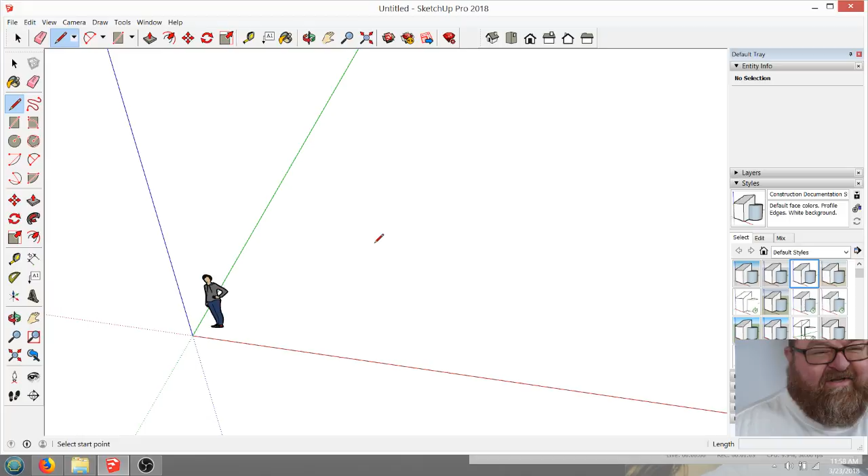But the way it was designed, it was initially intended to be a suspension cable bridge where those web members were designed to be supported by the cables. Anyway, I didn't really mean to start off this video that way, but it's a coincidence.

This viewer asked me about a truss for a pole barn, and so I thought I would help him out. He said it was going to be 26'6" wide, so I'll go into my upper view mode here, and I'll start off by drawing a line 26 foot 6 inches, and that's the width of his pole barn. Now, I tend to overkill this stuff a little bit. Let me make sure I've got my mouse tracking. I would make these out of 2x6s, but you can make these out of 2x4s. 26'6" is not a crazy span.

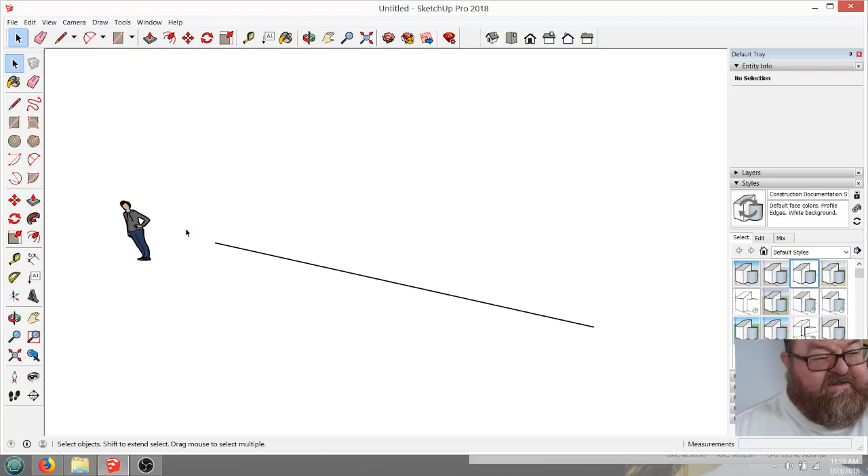Let me turn off this axis so I can delete this guy. It's funny because SketchUp comes with a little person in there to sort of orientate you to your view, but I've gotten used to it, so I don't need that.

Anyway, I'm going to make these trusses out of 2x4s because it'll be more economical. It's a pole barn, and it's really not that necessary. Let me turn my axis back on for a second. I'll just leave it on. It's not that annoying. The 2x4 trusses will be more economical, and so that's the width of our bottom chord.

I think we talked about a 4/12 pitch roof, so I'll come back 12 inches. For those of you who don't know, 4/12 means that for every 12 inches of run, there are 4 inches of rise. You see that doesn't match up with my 2x4 very well, but I'm going to make that line go to my 4-inch mark, and then we'll delete the part we don't need, that little part right there.

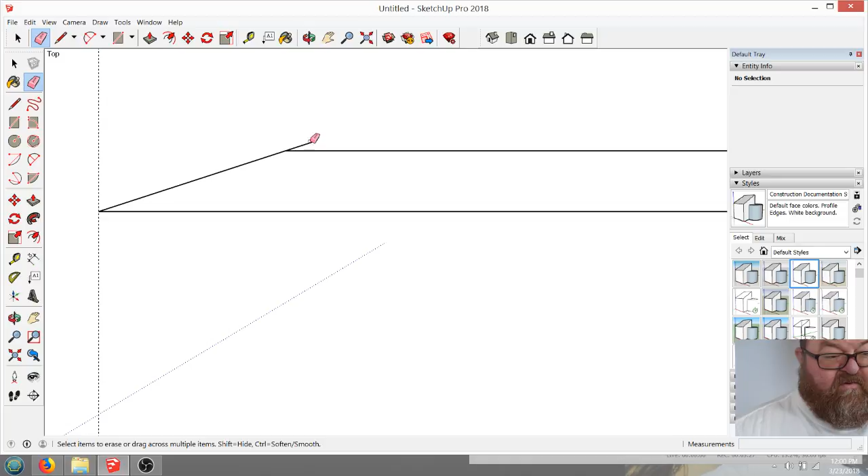And I'm going to do the same thing on the other end. I'll make sure I've got 26'6" again. I'll come down here, go back 12 inches, go up 4 for my 4/12, and that gives me the slope of the cut of the top of the bottom chord. Oops, I think I'll leave that 26'6" mark there. So that is our bottom chord.

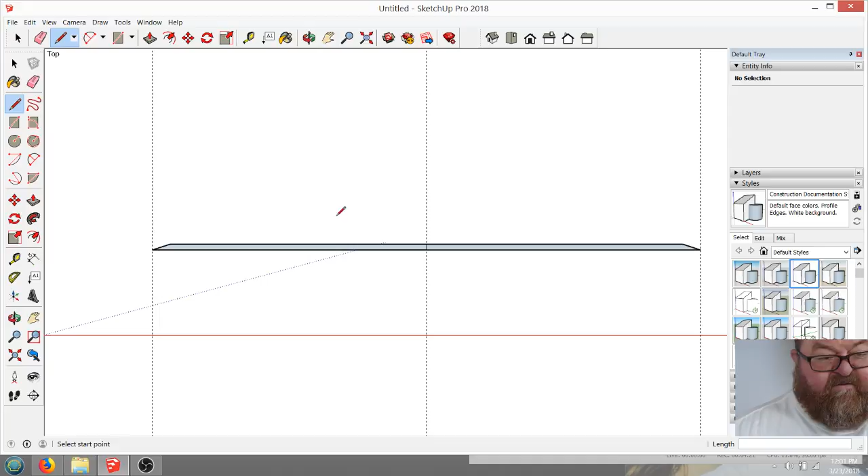Now it will be in 2 pieces. So where's the center? Right there. We'll draw a line for the center. Okay. Now, since my material is 2x4s, I'm going to offset this angle 3.5, 3.5, and give myself a 12-inch overhang that way. Then I'll start up here somewhere, go down to that mark, extend this mark down and connect those 2 points. Then I've got the start of my top chord.

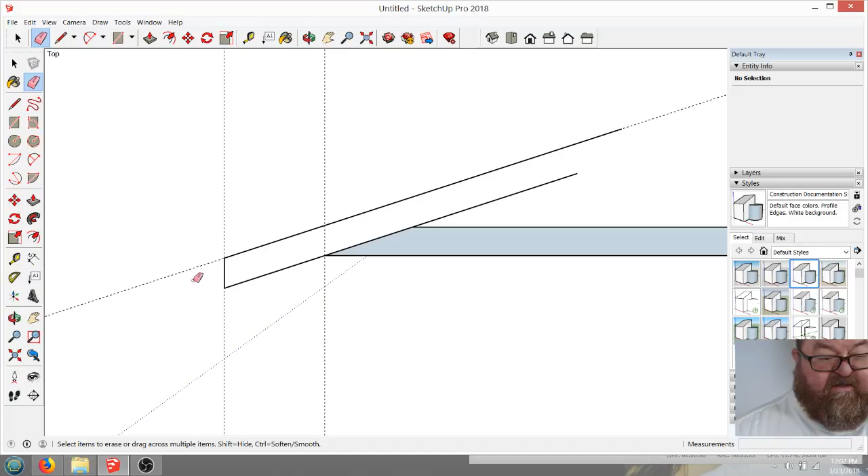And all this stuff is kind of easy. There's a free version of SketchUp online that's basically web-based now, which I think is really cool. I don't know what the full features of it are. This is SketchUp Pro. I'm not sure if it has the same features.

I'm just going to bring that line on down and bring that out, and then delete that.

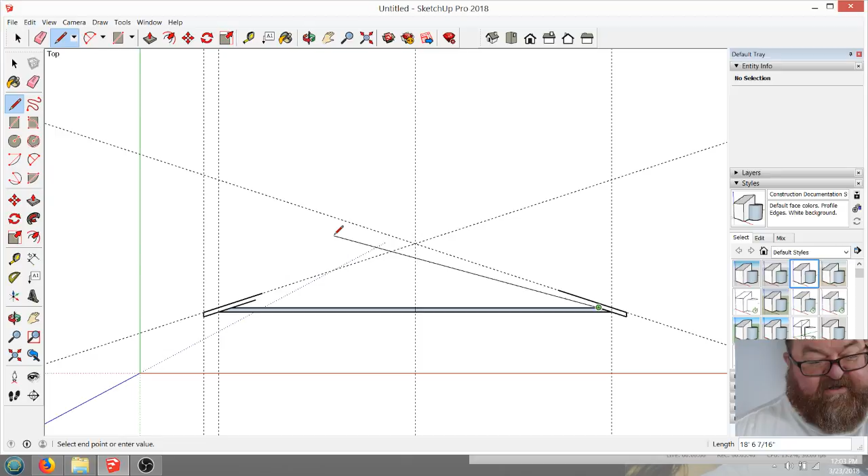Oops, got a little black screen there. Am I still recording? Yep. That's scary. Sometimes I'll get that and it will actually stop recording, and I have done hours of video before and lost it.

So now I'm going to run these lines up here like this. Run this up here like that. And then I'm going to clean all that up. I'll zoom in up here and take my eraser, get rid of those lines, that line. Then I'm going to draw a line down the middle, because these are going to be two separate 2x4s right there. So there we go, and I'm going to delete this face. So that's basically the outline of the truss. And just to give you an example, and I'll put dimensions on this later, it is 4'8" and 11/16 tall.

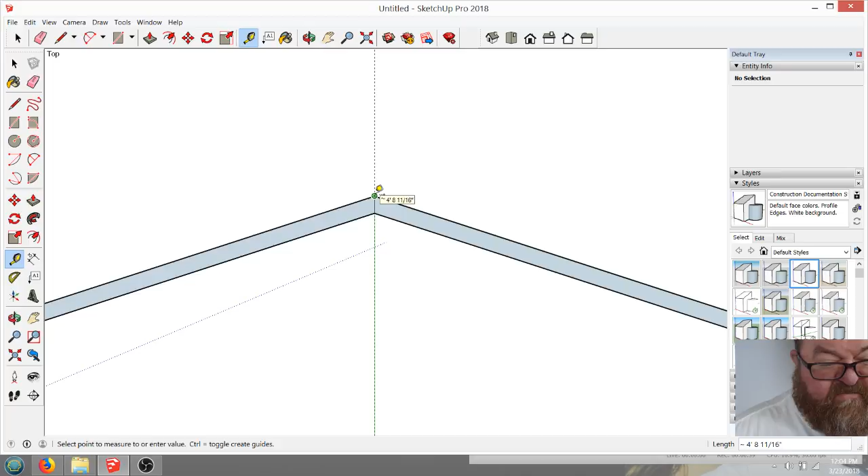And that's not too bad. When you're standing up here raising these trusses, it's nice when you can stand and see the top of them, so you can pull a string and make sure they're all lined up at the top.

Now, the tricky part of a truss, and this kind of goes back to the discussion about the pedestrian bridge in Florida, is that a truss has consistent web members. In other words, they're based on 45-degree angles. So sometimes, to keep this really simple, I'll just take my little protractor thing here and make myself a 45-degree angle like that.

And then I'll just draw a little line on that part, and then I'll move that line to the center there. You see what I did? And then I can extend that line on down.

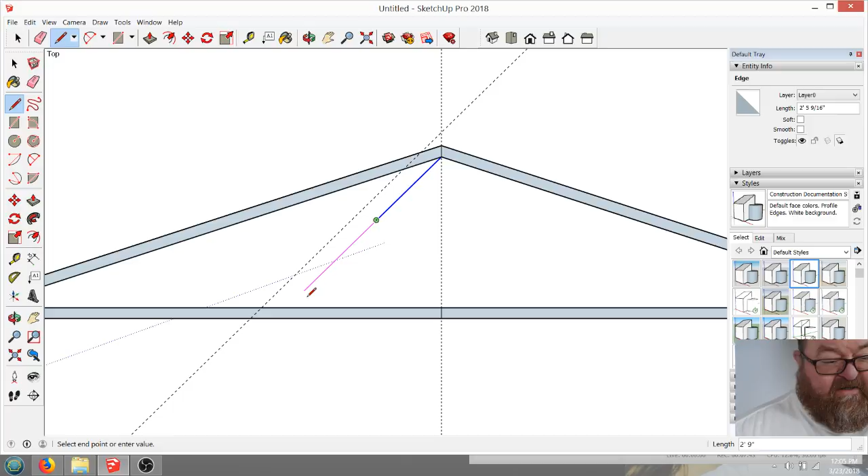Okay. Now, I hate these stinking faces. SketchUp creates a face because SketchUp is made for modeling, and that face is so you can put textures on it. Anyway, so that would be that first center line of my first web.

Then you're basically going to go from that mark, find that center, go up here and go back the other way 45 degrees. You see, and that's how trusses work. They don't go at funky angles. If you'll go back to the bridge, now on a rare occasion you'll have differences, but you can take these things to the nth degree.

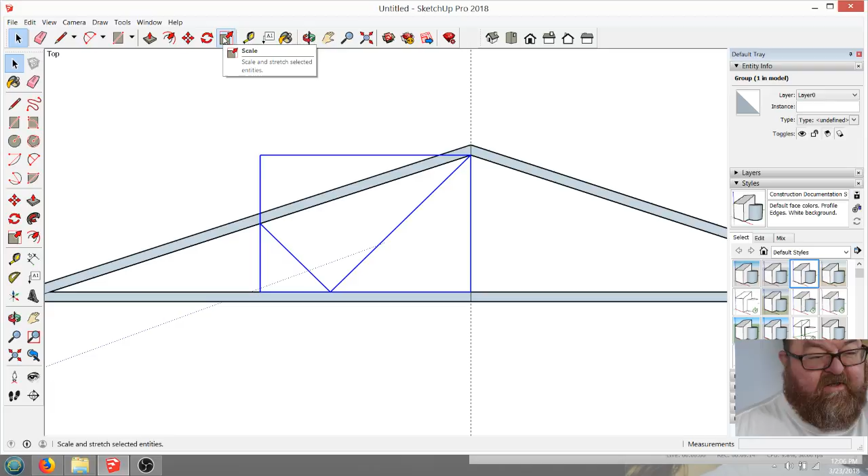You can actually do that again if you want to, like that, but that's not necessary on this particular truss I'm doing. Excuse me, got a frog in my throat already. So sometimes I do this kind of crudely. What I can do is create a group out of that, and then I can copy it, and then I can mirror that one.

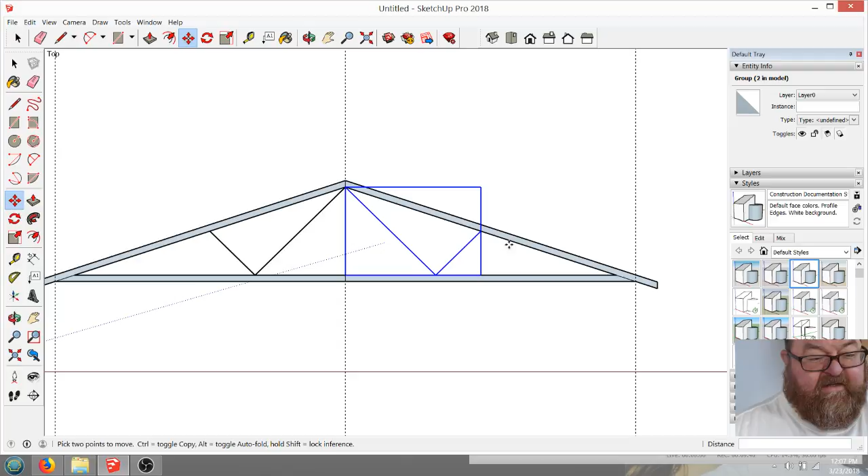Oh, wrong way. Sorry. I can't believe I made a mistake. I meant to grab that and mirror it. I meant to go in the middle here and go back one unit in that direction. I'm just going to delete that, but that's what it'll look like, to give you an idea in case you're just dying to leave the video. But I'm going to delete that because what I'm going to do is draw these first.

I'm going to complete this. So if these are going to be 2x4s, that would be 1.5 inches both ways. Like that, and like this. .75. .75. Okay, so then I would just have to complete all those lines. And I'll come back and delete all those faces. Now I can get rid of that middle part and my construction lines.

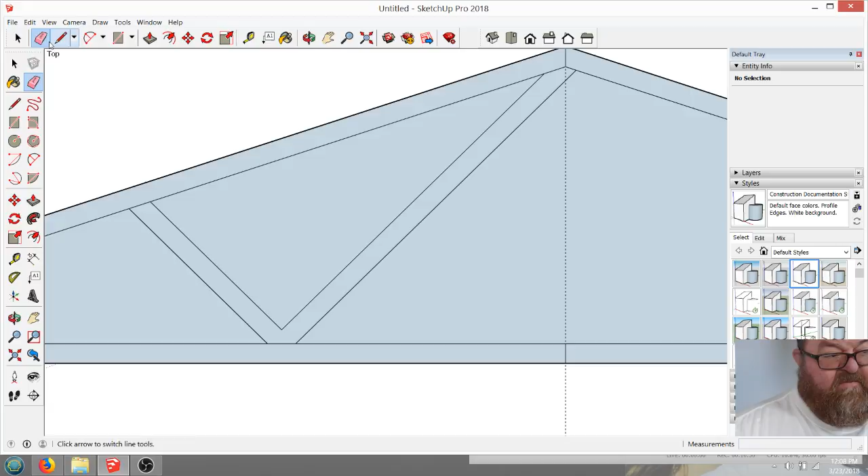I'm going to go ahead and delete those faces because they drive me nuts. I think you can turn that off somehow. That's one thing I need to look at. And now, I want to change this a little bit. I just realized what I want to do.

There's an alternate way of doing this, and I'm actually going to recommend it. I'll make a group out of this. I'm going to move this over, and I'll show you why in a minute. I didn't mean to copy it. I guess I just did, didn't I? Oops, I should have exploded that. I want this point to be on this side of the center, and I'll show you why in a second.

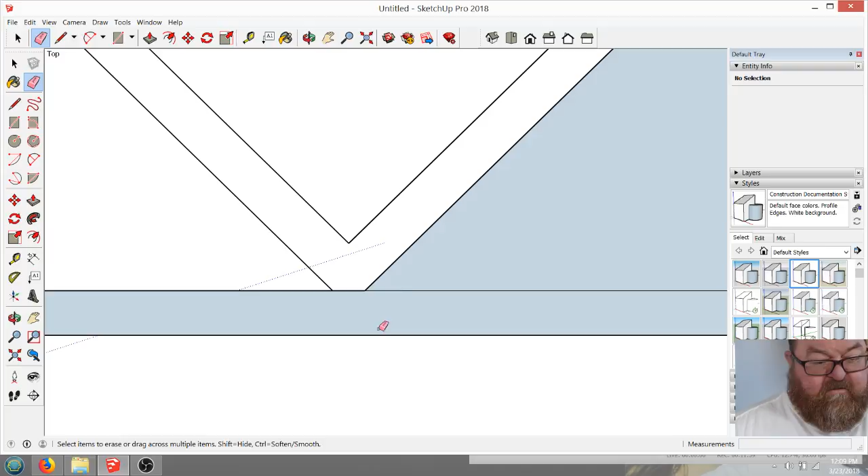So that just means I need to fix this down here. That needs to be extended on down. This needs to be deleted. And then that. Now, let's see. Okay, so it's been a while since I've done this, so I'm a little rusty. What you want here is 1.75.

What you want here is, you want this to come back like this.

Now my phone's ringing. Sorry.

And like this. Is that right? Yeah, that's the way you want that. And again, this will become more clear in a minute. Now I need to make this, because you want these to have a shape that's easier to cut. We'll make that a group.

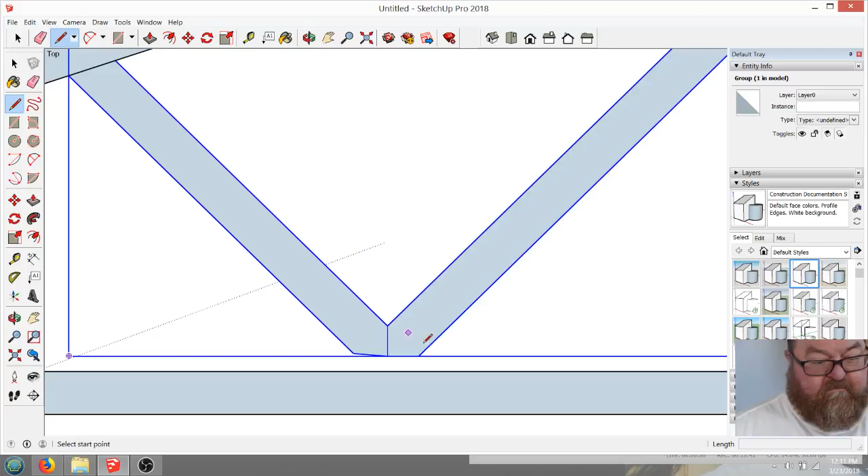Why is that not straight? That is odd. What happened? I didn't draw that straight. Wow, I'm losing it, man. ArtisanTony, you're losing it. I thought something looked odd about that. Delete all that. And you'll see what I mean. I'm just going to delete this temporarily right here.

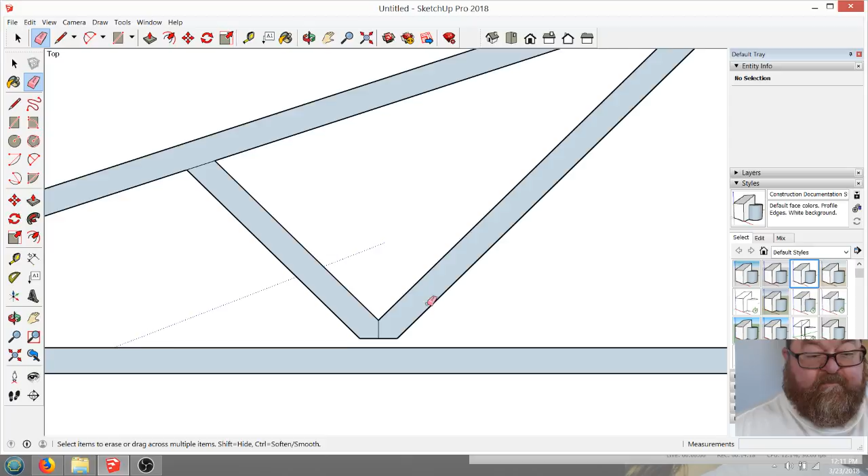When you start to make these web pieces, you'll want them to have basic shapes, easy shapes that you can work with. But what that means is that if you're going to have this member start here, that this all needs to, and I'm going to delete this for right now.

And see, this is why you want to plan this out, okay? You want to draw this out to scale, like this, because you'll avoid these mistakes in the field when you start cutting your pieces. All this needs to be planned out, and all your pieces. When you're building trusses, you'll know what your piece members are. You're not going to have any trouble.

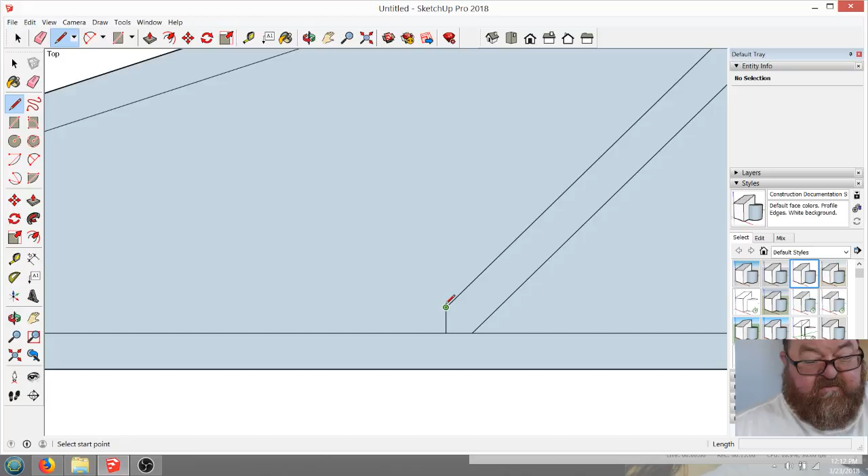Let's go back to, there's no mystery, right? All these pieces are going to be the same length on every truss, and that's the way you should approach this. Set up a little jig, make all these pieces, okay? And when I'm done, I'll actually make a little parts list.

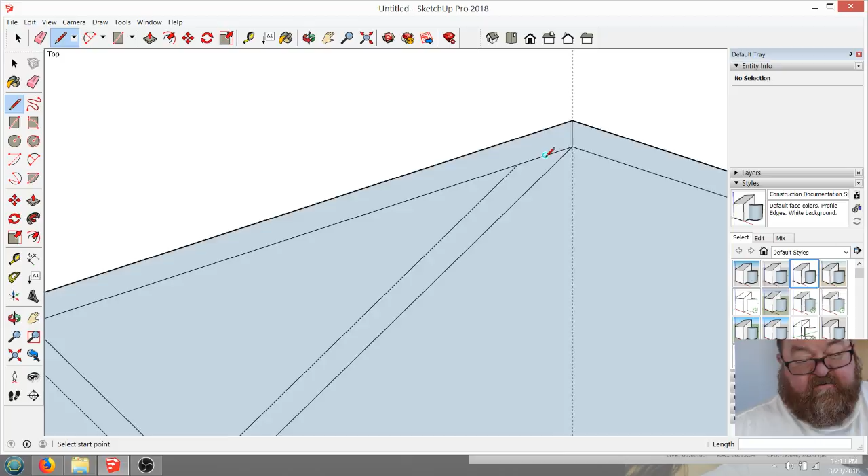Get rid of that. Now I meant to put that piece down like that. Now, that's going to make these 2x4s easy to cut. And I'm still up here. Okay, now I have that. I can copy that.

It's cold in this, golly, you know, in my boxers. I had to turn the heater on.

Make a group. And I'm going to copy that. Oh, I didn't mean to do that, did I? See what happens when these faces mess you up. Did I get everything I wanted? Yeah. Make a group. There we go. Now I can copy that. Roger, copy that. And I can mirror it.

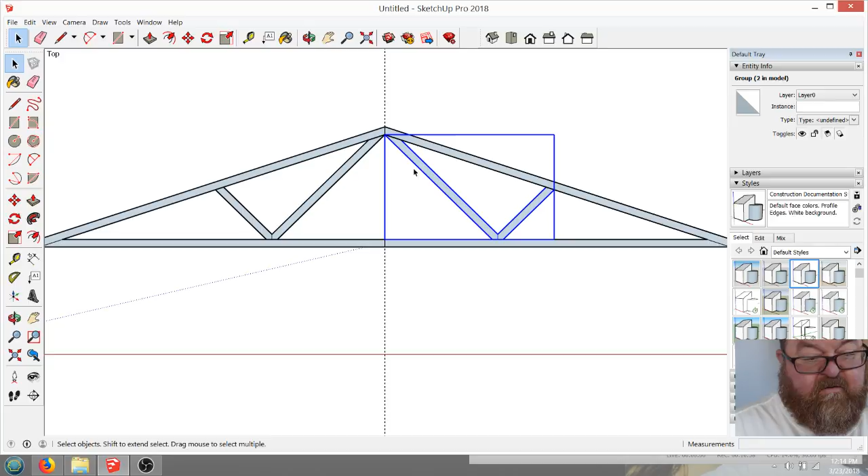And that'll be my other side. I gotta make sure I go 1 unit. There we go. And then it'll snap when you go 1. And there you go. What'd I do? Explode. Now, there you go. I know I've said there you go a number of times.

Now, what I'm going to recommend, and you don't have to do this if you're going to use the proper gussets, the connector plates, but what I like to do is go ahead and put a 2x4, one in the middle. I just like it, 2x4, because it just helps your bottom chord, especially if you have a really long span.

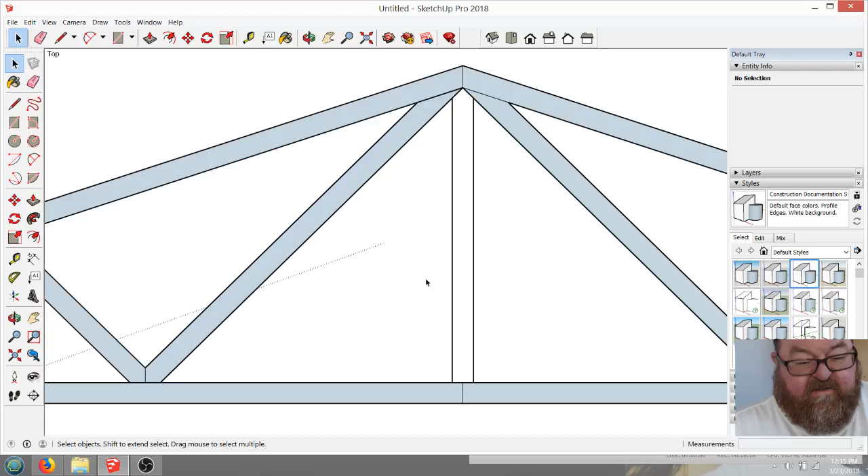Okay, now if you're not going to use this middle member, okay, why didn't I get a face? That's weird. What did I do wrong? Okay. Something's odd. Something is odd. Time to go 3D.

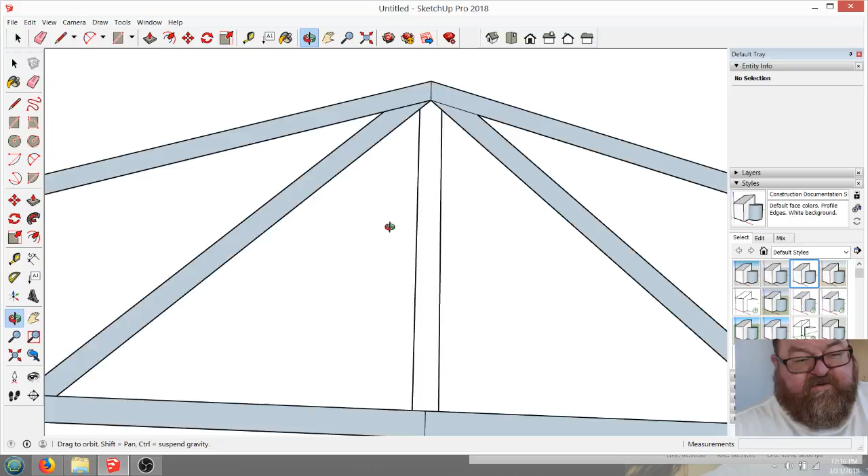So if you don't use this member, you'll want to move these webs back over. Well, you can actually leave it this way, but not really. You'll want to move this over to where half of this side is in the center and half of this side is in the center, so you can put one big gusset up there, and you can use either plywood or metal gussets.

And I'm trying to figure out why. I'm going to actually delete this because something's funky. I'm going to do that again. I should have gotten a, and this is where you get into some of these CAD programs. They have slight bugs in them, or if you're not careful, I'm not going to blame it on SketchUp. I'm going to run this line on up to here. I'm going to say, if you don't draw it right. I ain't going to blame it on SketchUp. And then I'm going to delete that.

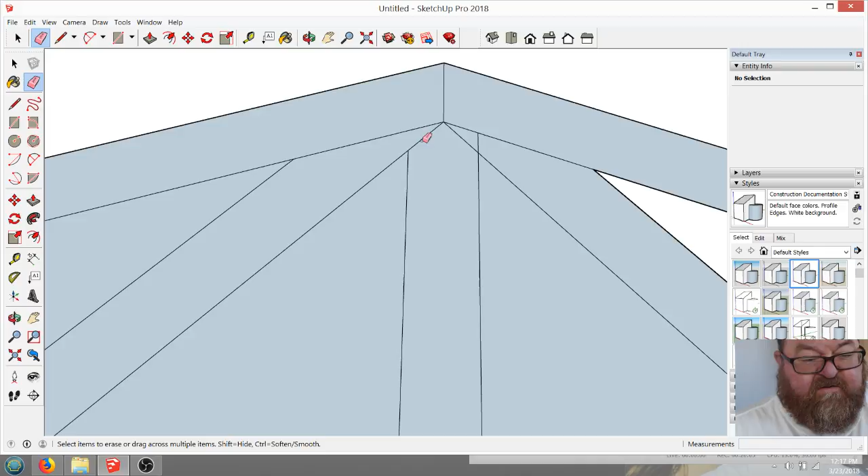You see, because it was, wait a minute. See, that's what I'm talking about. Oh, I get it. Okay, that needs to be exploded. Okay. Yeah, it's acting proper now. It wasn't acting proper. The faces weren't acting, and the reason was because I still had it as a group and I hadn't exploded it. I forgot to explode it from where I copied it over there. Now I can go back to my perfect top view, and we don't need these construction lines anymore. Okay, so there you go.

Now, if I had time, I may have time. Let me see what time it is. I'll go ahead and extrude these, but that's the way your truss should be designed. These should be 45-degree angles, and they should start at the center and come down 45 degrees. That 45 degrees is off of the bottom chord, okay? And then it goes 45 degrees back that way. And if this was a floor truss, it would look more normal because you wouldn't have these sloped top chords.

But you would just have 45 degrees going bam, bam, bam, back and forth all the way. And there's no ambiguity there. There's no mystery. There's no weirdness in design like there is in the Florida International University trusses, so-called trusses. They weren't trusses because, you see, in a floor truss, you can have loads act a little bit differently than they do on the roof truss.

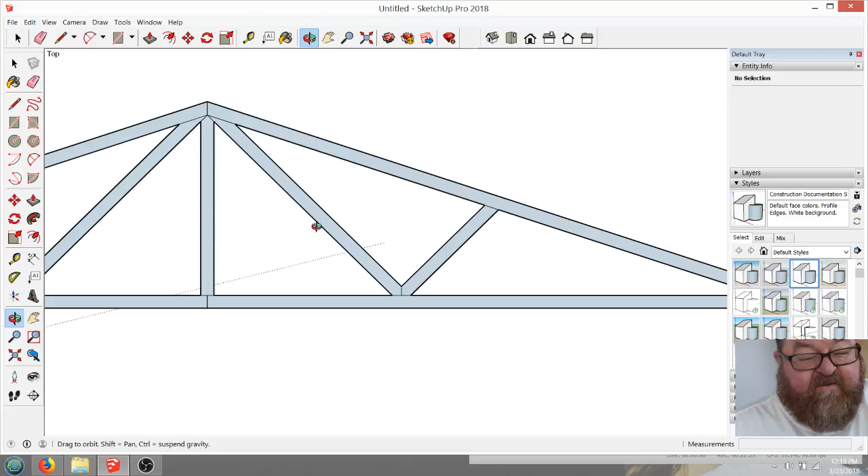The role of these web members changes as you go along, depending on where the loads are, and that is the problem. I'm going to talk while I go ahead here. That's the problem with the design of the Florida bridge. I'm going to bring these up 1.5, all I'm doing now is extruding this to make them 2x4s. It's not designed as a proper truss, and that's why.

And I don't know why people keep arguing with me about this. It's self-evident that it wasn't designed as a truss because it fell. You can't make every member of a truss in tension and expect it to go from tension to compression. And that's what they were expecting. They had tension rods in those web members, okay? And they were expecting the roles of those webs to change when they couldn't, because they were in tension all the time.

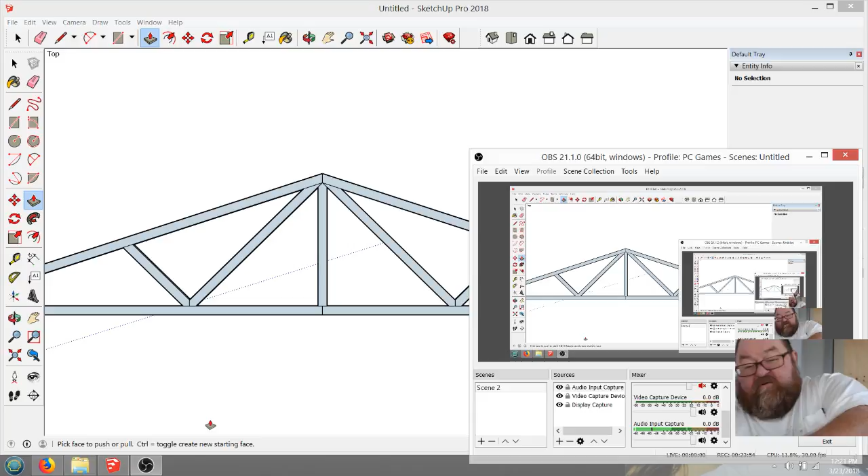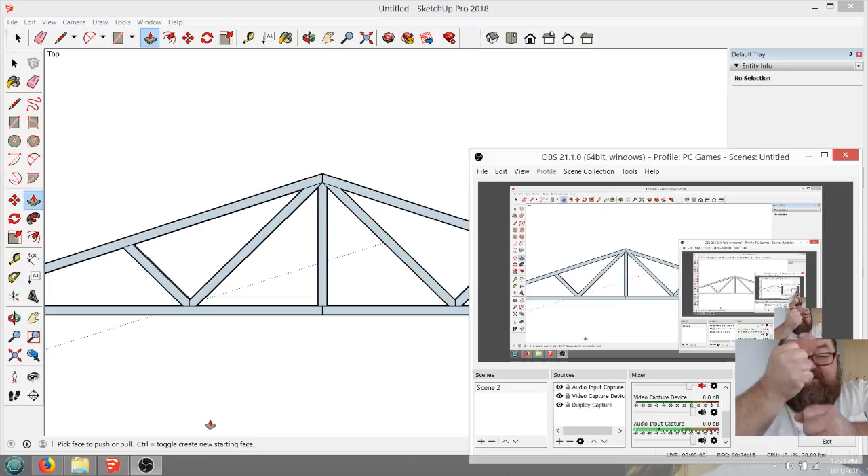So it's like you holding, I don't know if you can see me. Can you see me? It's like you holding a rope apart. I put my hands close. It's like you pulling on a rope. I got a rope between my two hands. I'm pulling, pulling, pulling. Now, set a concrete block on top of this hand. It wants to push, right? It tries to go in compression. Now you got a rod that's in tension, and you're trying to compress it. Okay. Anyway, I didn't mean to get off on that.

So now, I meant to say this in the beginning, and that is, you're going to have to check your local codes, your local building inspector, and ask them if this drawing needs to be stamped. If it does, you're probably not going to save any money. You'd probably be better off just getting a truss company to make these, because a structural engineer is going to charge you probably as much as you could buy the material for these trusses just to stamp it.

But if your local building official is not going to require a stamped drawing, and I've run into this before. I've built trusses in counties and municipalities that didn't require this because they were in rural areas and didn't have many inspections anyway. A lot of rural areas only have inspections for electrical and your septic system, and that's it. They don't have building inspections per se. In those counties, you probably won't need a stamped drawing, and again, you'd be better off buying the trusses from a truss manufacturer, unless you live way out in the boonies where delivery cost would be higher.

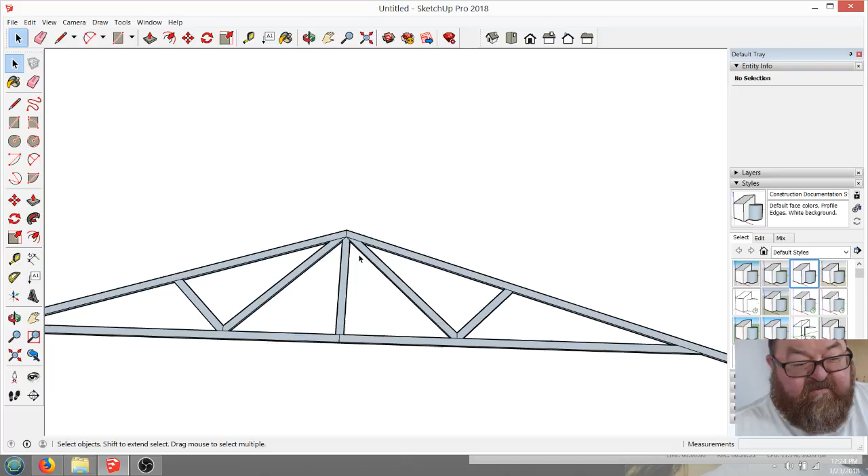I'm rotating it around in space. So what I'm going to do is make this whole thing a component. And if I had time, what time is it? I might have a little bit of time. I'm going to make that a component. Say create. Now that is a component. Well, you know what I meant to do? No, I want to make it a group first. I'll show you why in a minute. Make group.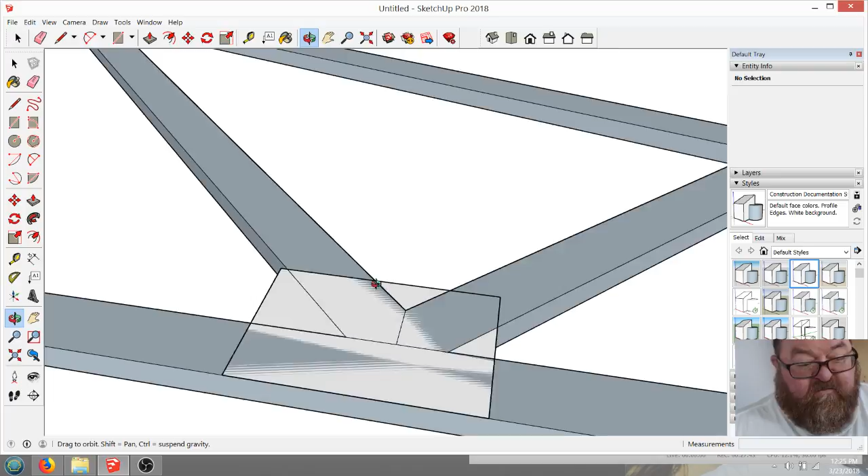Because I'm going to build these, I'm going to show you two different ways. And this is how we used to do it back in the old days. I've been in construction for 40 years, so I've been doing this a long time. What we used to do back in the old days is we would come up with a, let's call it 12 by 8, 12 inches by 8 inches. And then we're going to make it 1/2 inch plywood. Bring that up 1/2 inch.

You see, then I'm going to make that the group itself. And I'm going to center it. Let's see. How am I going to center it? I want to center, I'm going to bring this line down here for a second. Then I'm going to move. Is that my midpoint? Yeah. Put the midpoint back on that. Okay.

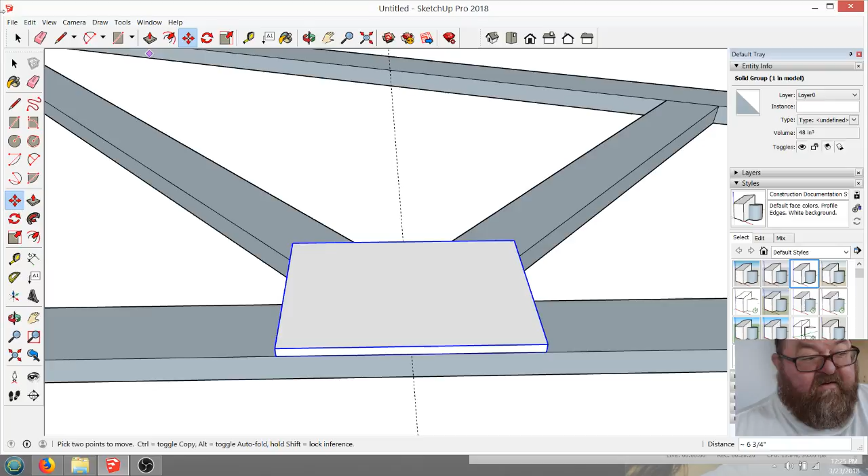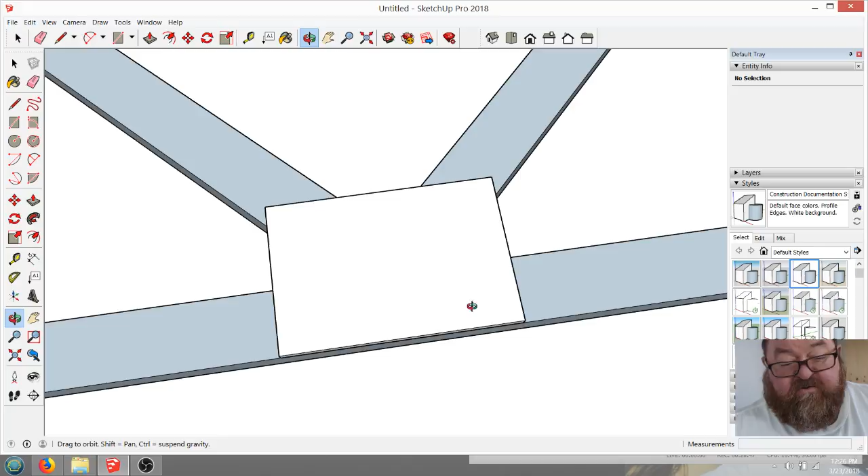So these would be plywood. And then what you'd do is you would use construction adhesive, and you would put four screws or nails in this one, 4 screws or nails in this one, 4 screws or nails, 4 screws or nails. You'd put a bunch of maybe 6-penny nails or 8-penny nails, and that would be your gusset. And you would put those, and you'd have one there,

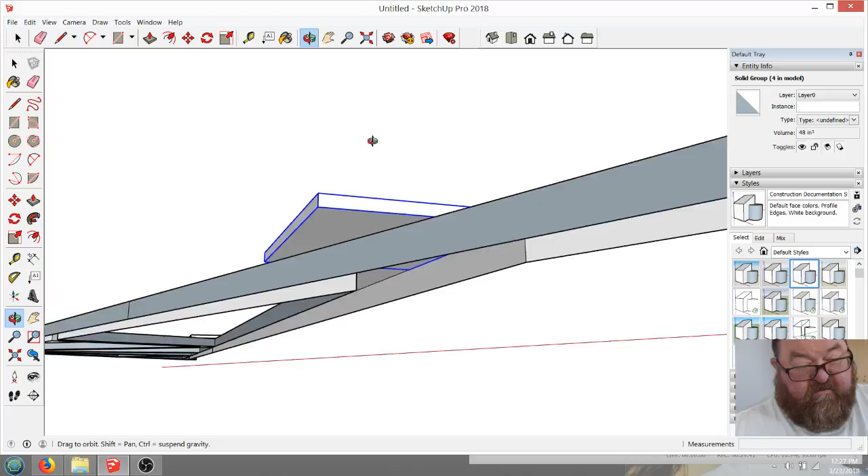and in the middle, oops, the black screen of death again. Now, let me see. Lock that, and I'm going to go there, like that. And then you'd have one over here. And that one you'd just run maybe to here. And then we'll edit this one. We'll make this a custom gusset for this end, like that. Okay.

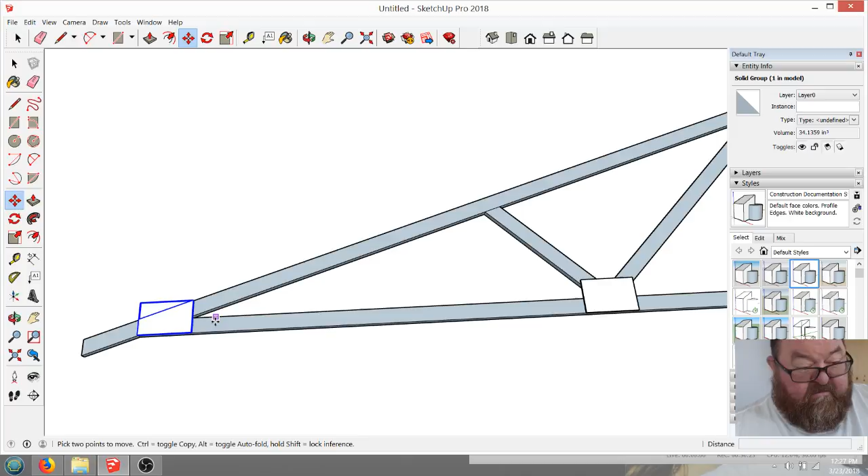Now, some people, I have gotten by with putting these on one side. You can put them on both sides. You're better off putting them on. Let's see, yeah, I can copy that one. Copy. I'm gonna go down here. I want to mirror that one. Didn't mean to get funky. Gonna get to where I can see it. See the nodes. There we go.

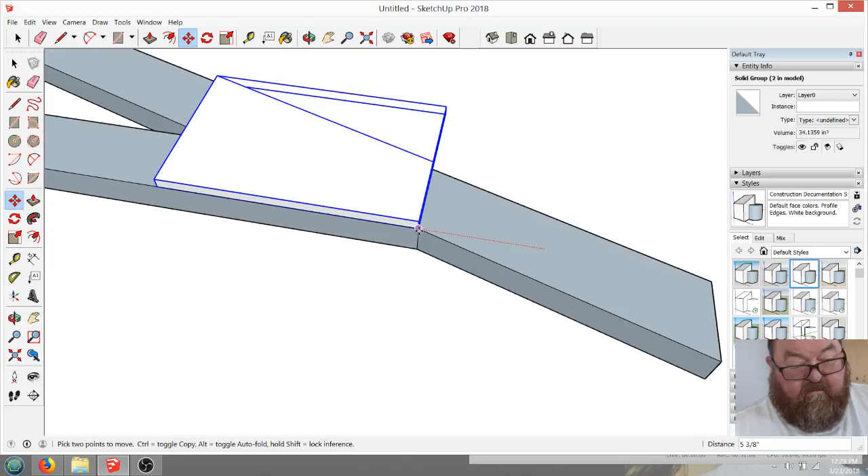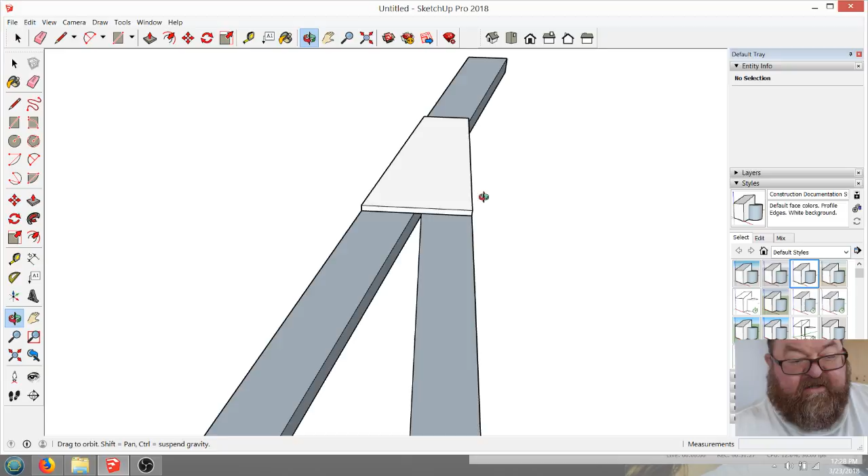Like that. And again, these connector plates need to be big enough so that you can get a glob of construction adhesive underneath them and get plenty of nails. And this is where the ambiguity comes in: the structural engineer, if you have to get these stamped, is going to say, well, how much glue are you going to use, how many screws are you going to use, and how big are these gussets going to be? And you see, it just gets fussy.

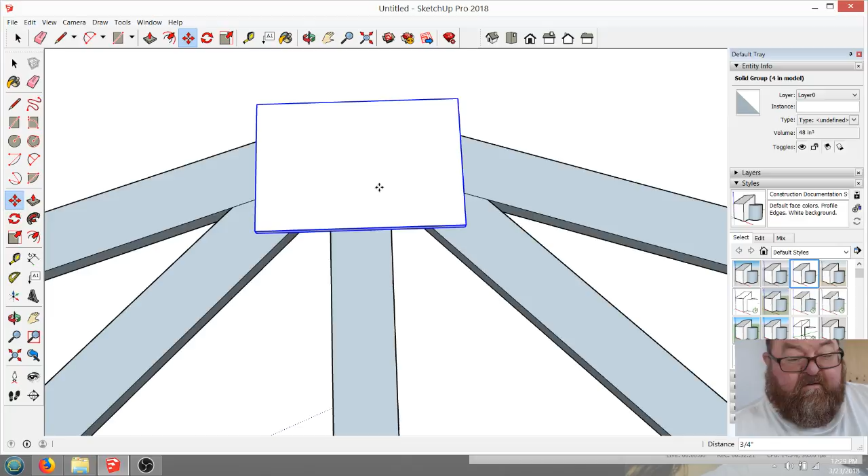And then you'd have a big one up here. This might work, I don't know. You want to make sure these are big enough. Let's see, how high can I go? I'm just going to say 8 inches is a good height. And then we'll modify the length of it.

So I can quit spinning around in space enough to where I can keep up with where I am. This is what gets frustrating. Uh-oh, I don't have a back on my truss. I'll have to fix that one. There we go. I know it's got to be frustrating for you if I'm spinning this thing around like that. Oops. Gotta make sure you get your snap point right.

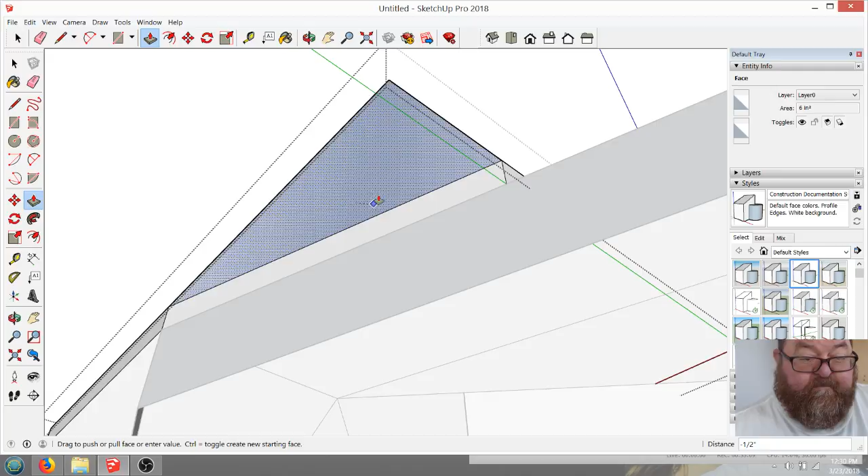That's one thing cool about SketchUp: the push-pull tool allows you to push material back, and if you just want to delete that face, you hold it on the other face and it'll just disappear. It'll just zap it for you. Now let me fix this right quick, if I can get this spun around.

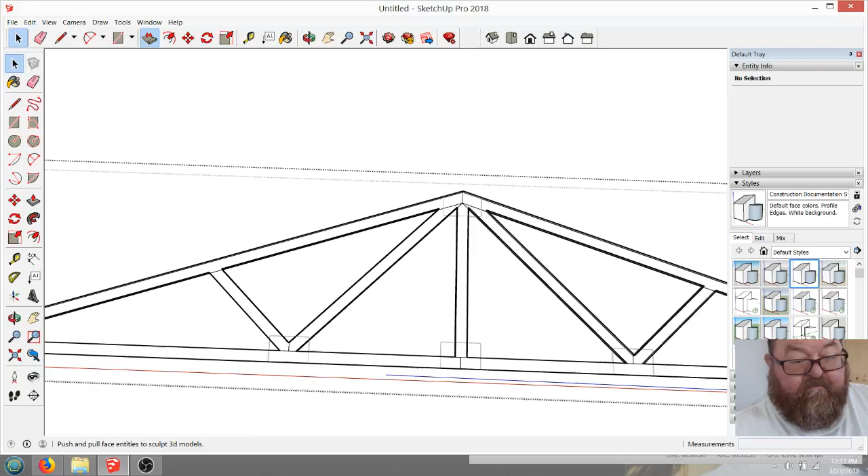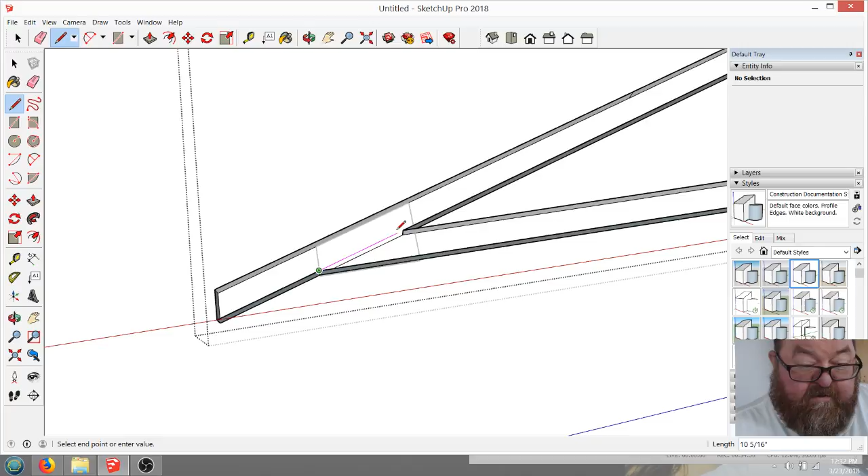What happened here was I thought I had a, yeah, I'm not doing it right. Sorry. In SketchUp, it might be easier to just draw a big rectangle and put the back on it that way. Let's see if that'll work. No. Okay, that's the weirdness of SketchUp. Sometimes things just don't work out the way you want them. So it wants me to go in here and connect all these little, oops, which could get boring, but let me see how fast I can do this.

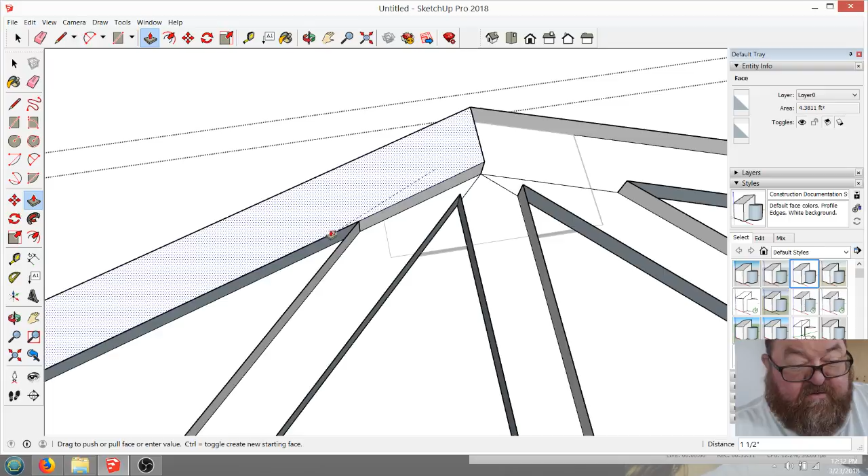Maybe if you hold the control key, yeah, that's probably the quicker way to do it. It'll pull those faces back up. I mean, it'll copy them instead of trying to, you gotta be where you can reference something. Let's undo that. Now we're just getting into the minutia of SketchUp, aren't we?

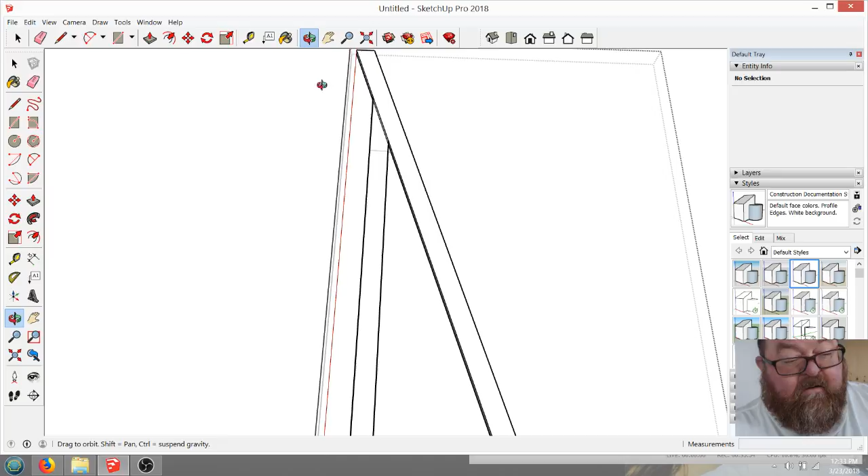Did I get all my faces done? Looks like I did. No, isn't that something? It gets tricky, man. Uh-oh. Gotta pay attention to what you're doing. So that's enough on that. So I'm going to turn this back over, and now you can see where all the gussets are.

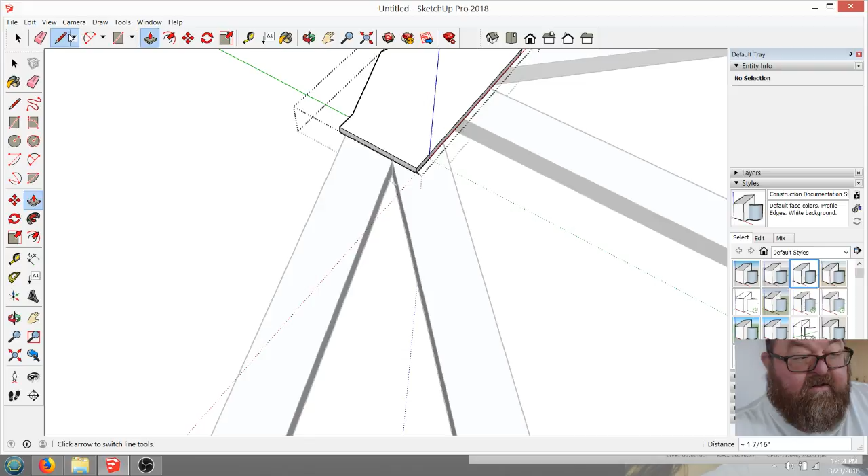Now this one, these really should be bigger. Okay. Do I have time? What time is it? I guess I better finish this part because then people will say, that ain't right, ArtisanTony. The only thing is I gotta bring that little part down and get that little nip off there, like that.

So these just need to be big enough when you make them to get enough surface area to get a glue amount. And you see, this is where your questions are going to come up, like I was saying earlier. And sometimes after this whole experience, you'll say to yourself, dang, why didn't I just order these trusses with all the time that I spent?

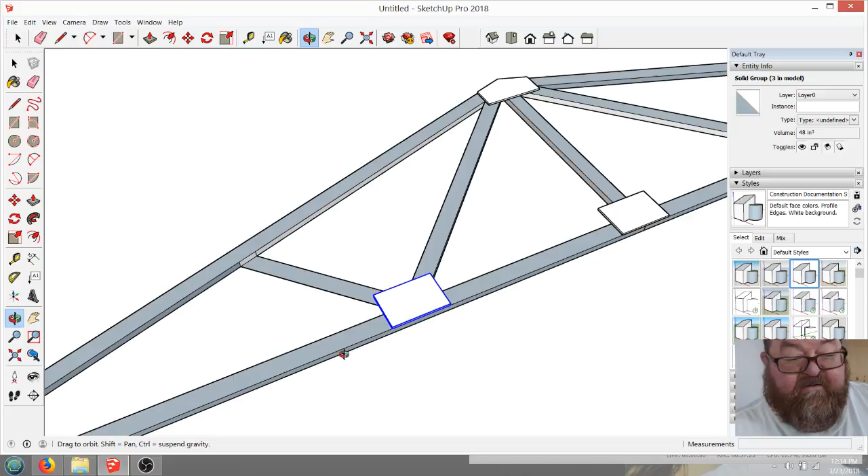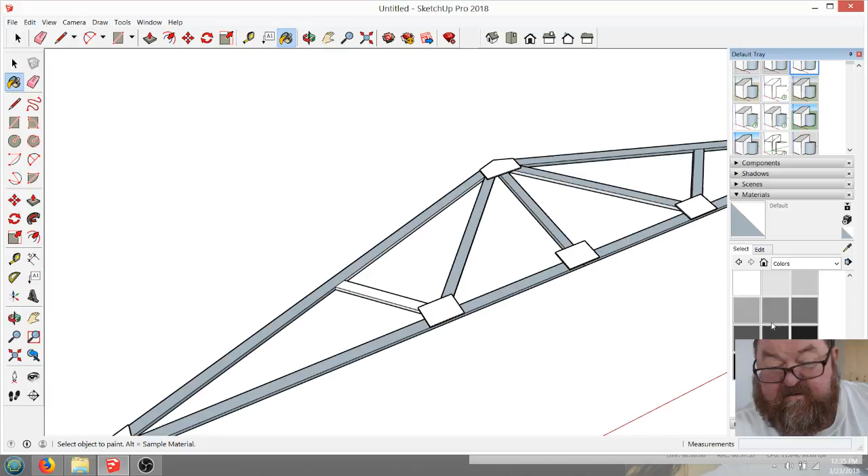Now, further in the interest of time, I'm just gonna. What did I do? I screwed up my truss, didn't I? I don't like this blue thing. Turn it back to white. There we go. Fixed you, didn't I?

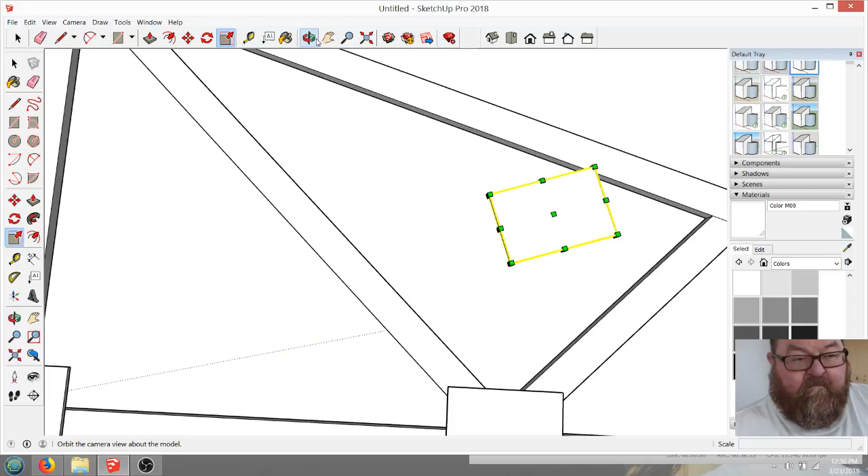I'm just gonna copy one of these right now, just so I can say I did put a gusset on everything. And then move that. It doesn't need to be that big for those. That didn't do any good, did it? That was silly.

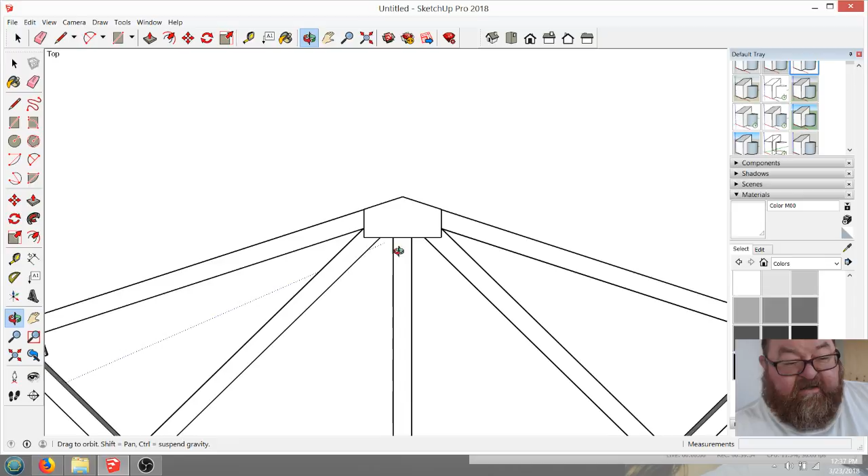So now we've got a gusset. Now you can make those gussets smaller for those. The rest of these I would make as large as I have them. As a matter of fact, this gusset here wouldn't hurt even if that point came over a little farther. But you see, just getting your truss the right length and the right height and the webbing is one thing.

All of those connections, and this was the point I was trying to make about the bridge in Florida. The connections are everything with trusses. You have to be able to create a stiff enough connection so that they transfer the loads. The only way this web member can transfer the load to this one is if it's connected so well that it's practically the same member, right?

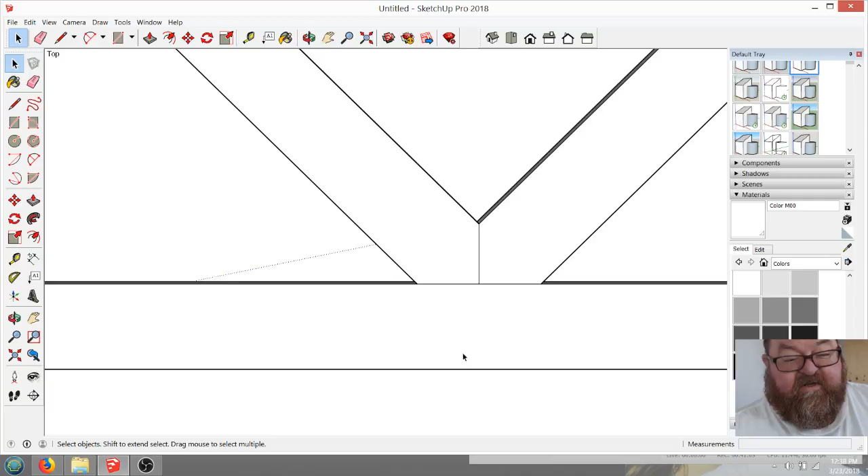If you've got very loose connections, or this thing just comes down and meets, let me give you an example. Let me delete that for a second. If you attached this member to the bottom chord independently of attaching this one, it would not transfer. When this pushed down, it would just push against that. This needs to be so stiff of a connection that once this is pushing down, now it's starting to pull down on that.

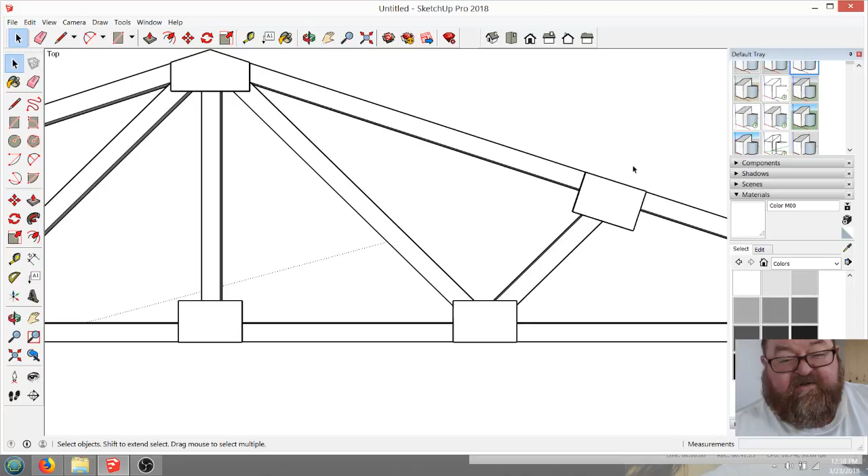This is in compression, that's in tension, if the load is here, pushing down. If the load is up here on top, now these are in compression, and this is in tension. It's pushing down, down, down, down. Up. If I had a big pile of snow up here in the center, it's pushing down and then pulling down on this. If I had a big pile of snow right here, that's pushing down there and pulling down here.

And I don't know why some people have a hard time with this. I've had a good number of views on the original video, but the follow-up video I did was really the one that explained more. I was just kind of goofing around in the first one and asking why.

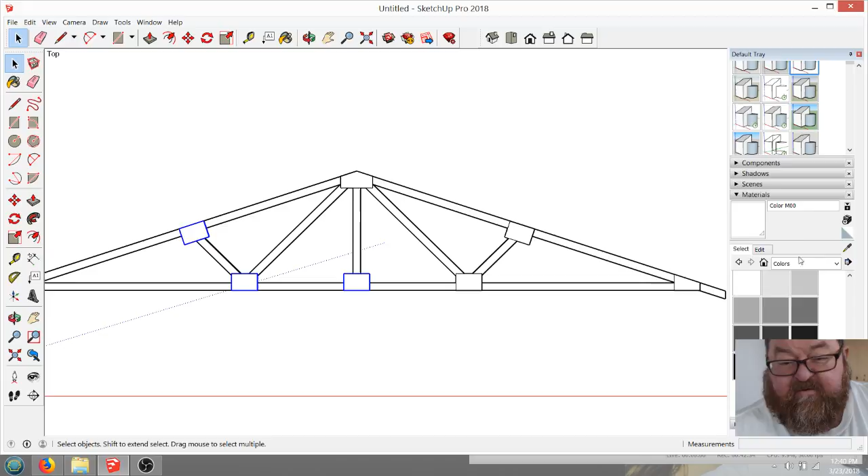Okay, so you see the gussets there. I'm gonna make the gussets a group themselves. I know what I'll do. I'll make a layer called gussets, I'm just going to say plates. Make it easy. And then I'll put all those in that layer, go here to my entity info, put that in that layer, then I can just turn that layer off. Okay.

So now, pay attention because I'm going to give you the dimensions of these. So let's see, I may just leave them on here. Oops. I need to do this in Layout. There's another program called Layout that comes with SketchUp Pro.

Because it's wanting to, if I snap it there, it's basically 15 feet, but it's 15 feet 1/4 of an inch. Now, in reality, you could probably skip that quarter if you wanted to, and have a 1/4 inch less overhang if you were trying to keep this simple. But from long to short, this is what we call this measurement, long to short, because you're measuring from the long side of the angle up here down to the short part of the angle down here, is 15 feet 1/4 inch. I'll just show you that.

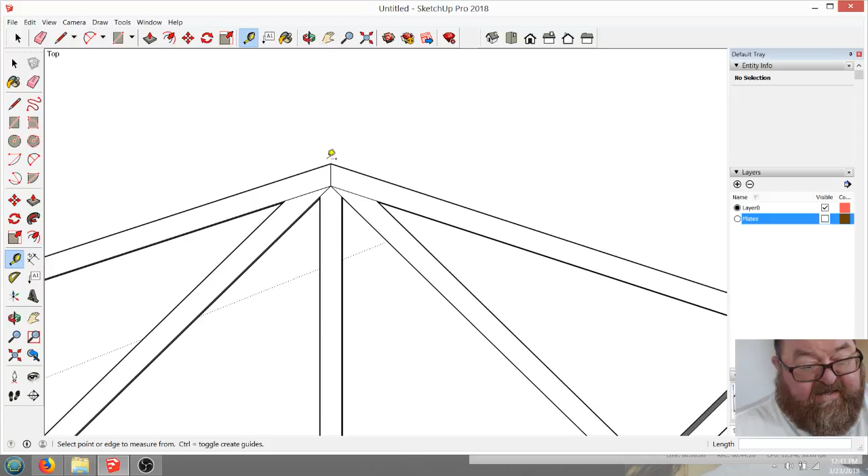Okay, then that gives you your 4/12 pitch, and that angle will be a 4/12 pitch on there, and then these obviously are 13'3". Yep, and what you can do, I'll just zoom in on that, 13'3". What you can do is you lay your framing square. This is the back side of the 4/12. Let me see if I can draw a framing square right quick. Let's see, I think that's 12, and this is 24 inch. I think they're 1.75 inches.

Now I'm really making this video long, aren't I?

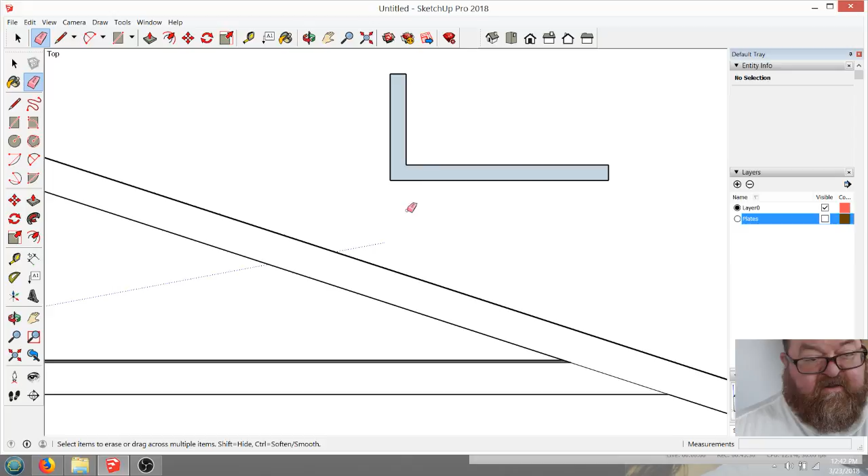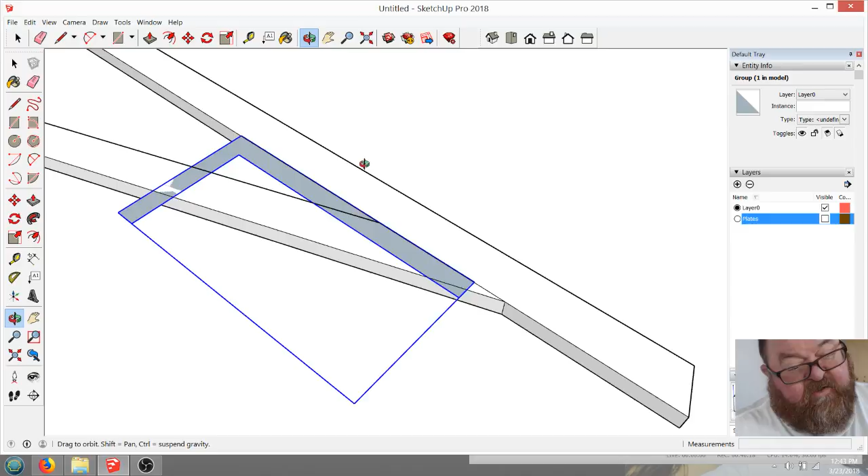Okay, so I'll show you right quick how you do that. What you're going to do is spin this around, except I need to flip it over, so that means I have to mirror it like that, and then I got to spin it around like this. Okay, so that's what you're going to do. Let me just get the angle right first. Yeah, you're going to put your 12. Let's come in here and find the center. Come on, cooperate. Let's just say that's 12. Okay.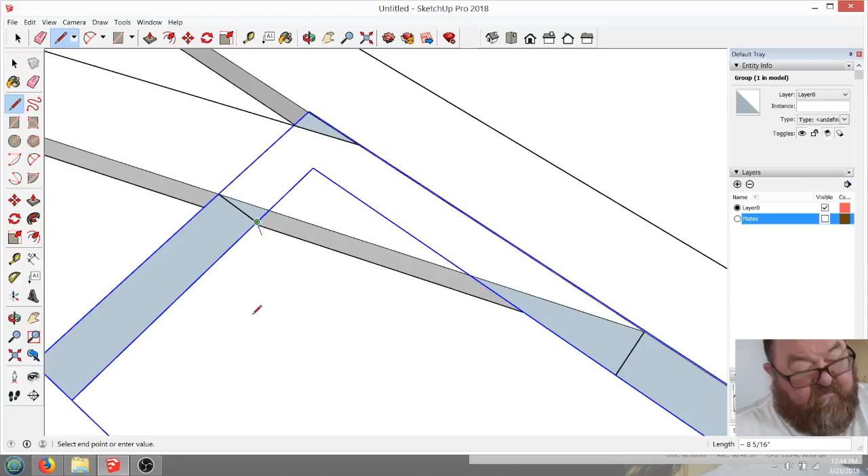You're going to put your 12 on your framing square right here. That's your 12 mark. And this is going to be your 4 mark. Yeah, that's right. You see how I did that? And that's the back side of the 4/12. You'll see what I mean. If you take your framing square and lay it on your member, use the long side to get your long angle. Just remember that. Put this on 12 on your 2x4, and put this on 4. You know how you count down your framing square? You got 1, 2, 3, 4 inches. So your 4/12 does that.

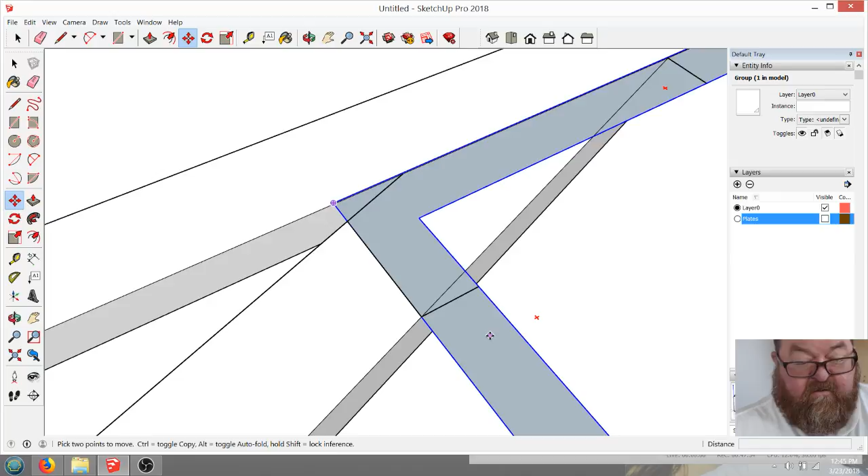Now this is the other side of the angle. This is your ridge side and your tail side of the angle. You see that mark right there? If I was going to mark that with my pencil and then move the framing square out of the way. You see, I just made the mark. That's called the short side of the 4/12. This is why framing squares work better for stairs and rafters. That's how you get this long cut right here. And this is called the short side and the long side of the angle. They're both 4/12s, they're just different degrees. So this should be 22.5.

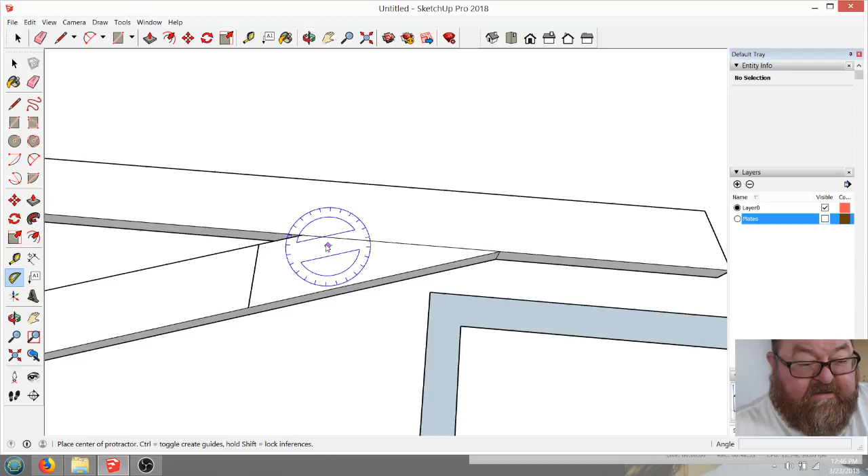If I was going to show you on a protractor, let's see, no, I'm getting 18.4 degrees, is that right? I'm losing my mind. I thought it was 22.5. 22.5 is half of 45, so maybe that's where I was getting at. But this is 18.4 degrees. The point is, you've got a long side and a short side, the long angle and the short angle, and that's how you cut this one on the end of that 2x4. So we'll just delete that.

Probably should edit that part out, but I'm not going to edit this video. I'm just going to keep it that way. Hope that helps.

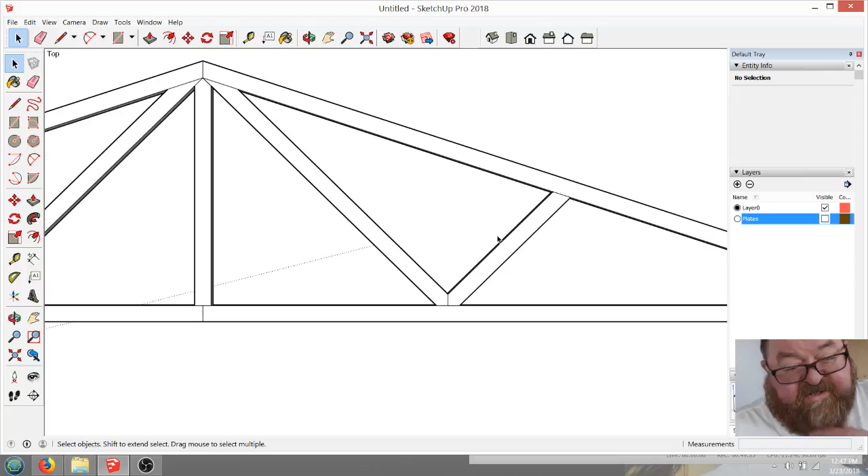Now let me just go ahead and I'll dimension these others for you, and you'll just have to look at the video. That's 2'7.5" to there. And if you really need them, let me go to here. I'll put some construction lines, and I'll dimension the center lines, and this will make it easier for you, okay? That's 2 foot 10 and 1/8, okay?

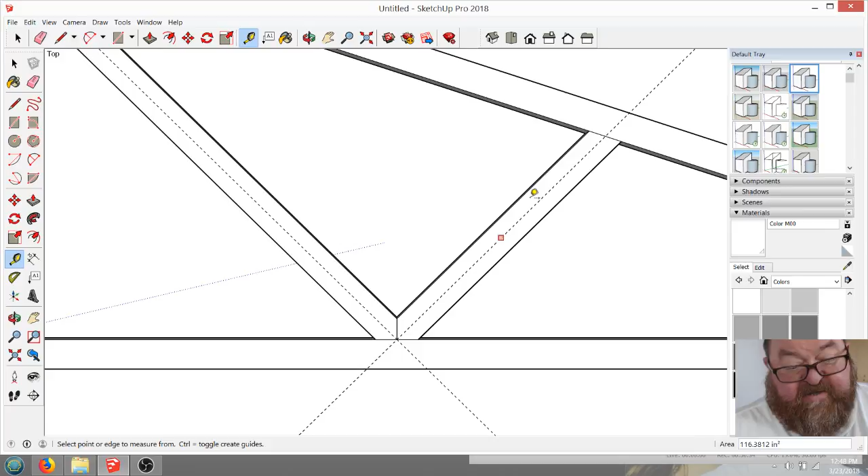So this angle is going to be the 4/12, but this angle is going to be 45 both ways, you see? Because this is a 45 this way and that way. So these angles right here are 45. And that one's 2 foot 10 and 1/8, that piece right there. The length of this one, and these are center lines, remember, is 5 foot 8 and 1/4. 5 foot 8 and 1/4, okay?

Then this dimension is 4 foot 1, 4 foot 1 and 1/2 to that point. And that is a 45-degree angle on both sides of that.

Okay. Now I can send you, and what I'll do is I'll try to put this as a download on one of my websites. And when I get it up there as a download, it'll just be like a paper version of it, a PDF version with the dimensions on it. But hopefully that helps get you going.

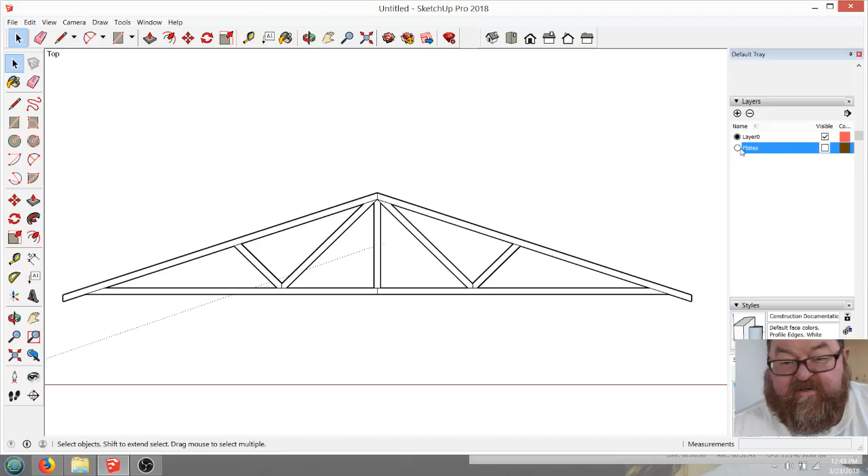And if I get a chance this weekend, what I'll do is I'll take the whole thing. Let's see, turn my gussets back on. Now I'm going to make this whole thing a component, see? So I've got all those groups which make up my component, which is a truss. So now I'll zoom in on the end of this, and how am I going to flip this up? Like that. Yeah, 90. Now I'll raise it up in the air 14 feet.

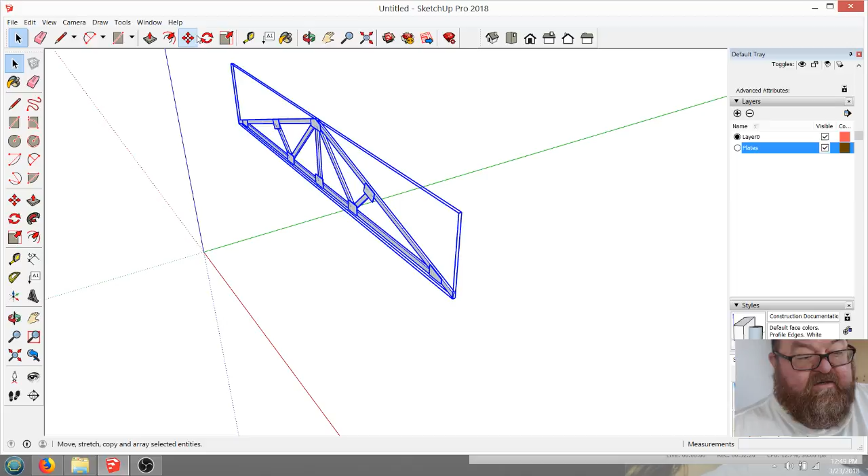And you said your building was 36 feet, so you'd have these, copy this. Oh, let me just do a real quick copy command. Because this has been something that I have had to go over in my other videos, but I haven't really explained it very well. If you grab this move copy tool up here, and then you select your item, and then you click on a reference point on the item.

You hold down the control key. If you don't hold the control key down, you're just going to move it. If you hold the control key down, you're copying it. Okay, so I'm just going to move it out here in space somewhere, and I'm going to say 24 inches. Now I haven't done anything else. Now I'm going to say times 18. Asterisk 18. You see? And that's how I got all your trusses just made, like that, right?

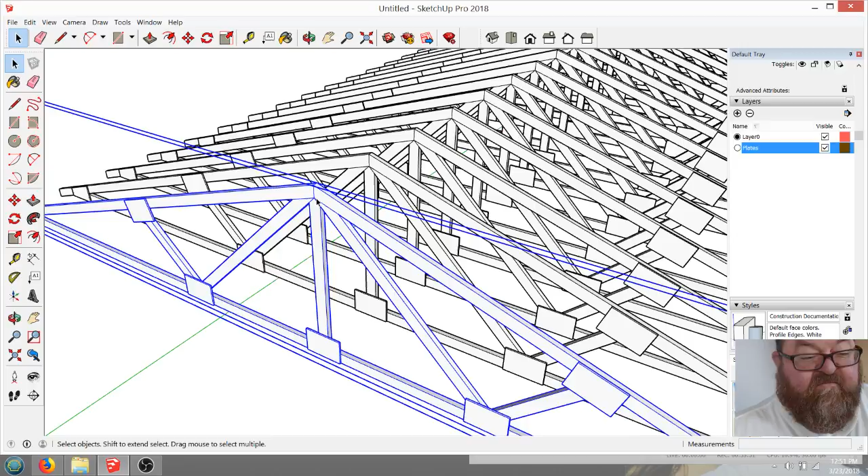Now, because I made that truss a component, now I can go in here and alter. Let's say I don't like that gusset, I'm going to just delete it, right? You see it changed all of them. That way, if you say, oh, I really want to make this a 5/12 pitch, and you wanted to go in here and really screw all this up, and grab it and start messing with it, like this, that would be funky, wouldn't it? You can change them all, you see, but that's the danger of doing that.

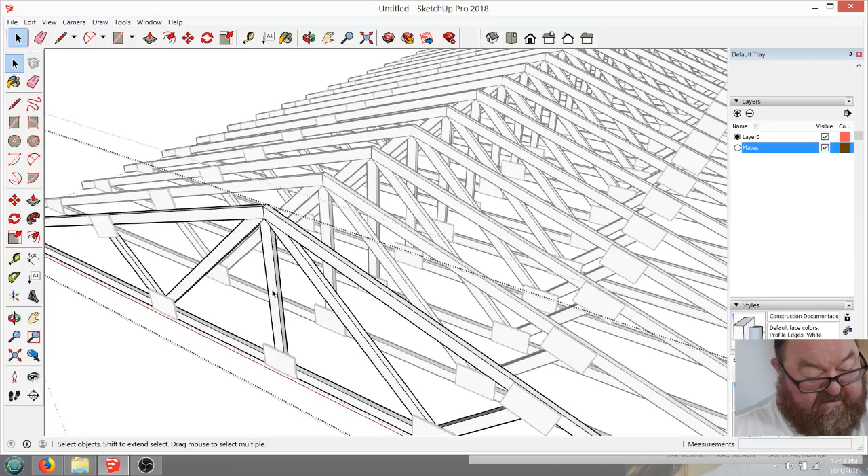I want to change it back. Put my gusset back on there. There we go. Now I'm back to being square. Now, if I have time this weekend, I'll go ahead and draw the entire pole barn to your dimensions. And so I hope this helps.

Hope I didn't make this video too long. It probably is, but sorry. And I don't want to edit it, so it's just going to have to stay that long. I don't have time to edit anymore, really. But if you have any other questions, let me know, and I hope that helps.

And I will try to go ahead and do a dimensioned drawing. I just have to do that in another software, to get better dimensions. It's this one called Layout. It's the construction document part of SketchUp that doesn't come with the free version. So it allows me to create actual drawings. I'll just pull up one of the ones I've already been working on. This is a house I'm building now.

Go to this perspective. There's the perspective. Here's the floor plan. But you can see things are easier. The dimensions work better, and I think they purposely did this, and text, everything works better in this. This is made for making your construction documents, your physical drawings, after you've done the modeling in SketchUp. Layout, you can see up here it says Layout. This is the software you would use to do your construction documents from your model.

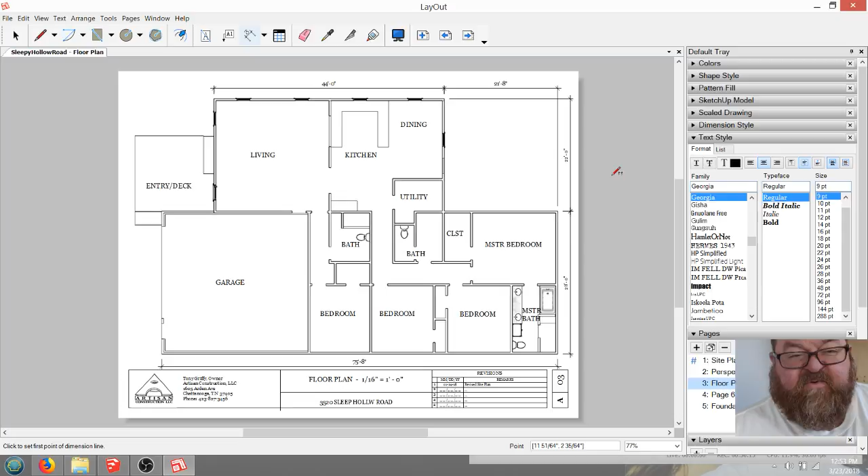So I'm just going to turn that off for now. And so anyway, I hope that helped, and I will try to get the dimension drawing up, and this just has to be close if you want to take those dimensions that I gave you and use those. The basic scheme here is, this is 45 degrees, that's 45 degrees, that comes up to the center, then you have the center pole, and that's how it works out. Then they go on 2-foot centers, and then you'll have purlins that go across those, and it's very strong, you see.